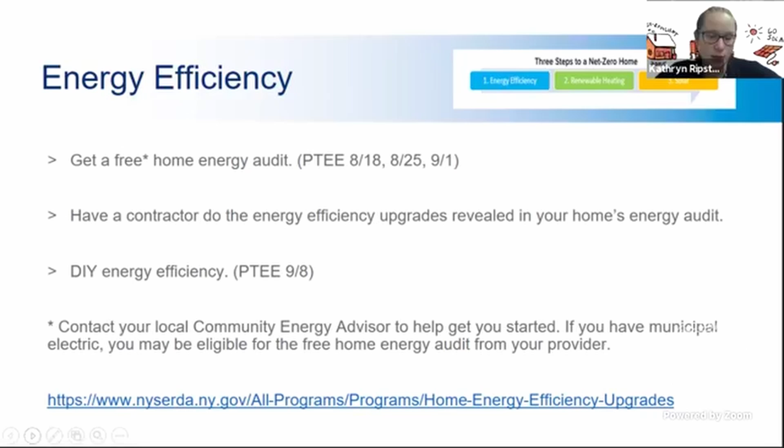So reviewing energy efficiency, one main topic that we talked about in the past is the building envelope and how important that is to your home's efficiency. So if you're heating your home, you want a nice tight box to keep that heat within your home. If you're cooling your home, the same concept. You don't want to be paying to heat the outside air.

And so now there's two main things that make up the building envelope, and that's insulation, which we're going to be talking about today, and an air barrier, so air sealing. And it's really important which order you have these in. So insulation you can compare to a wool sweater. So putting on a wool sweater on a cold day, it's going to keep you nice and warm.

However, there's still holes in that wool sweater that allow air from the wind blowing to penetrate and cool you off. So adding an air barrier on top of your wool sweater, such as we'll compare that to a windbreaker jacket, that'll help reduce that amount of heat loss. So I've got my cozy wool sweater and I have my air breaker over it. The air breaker is blocking that wind from penetrating inside my home, and the insulation is providing that heat, the warmth, and the resistance to the flow of heat.

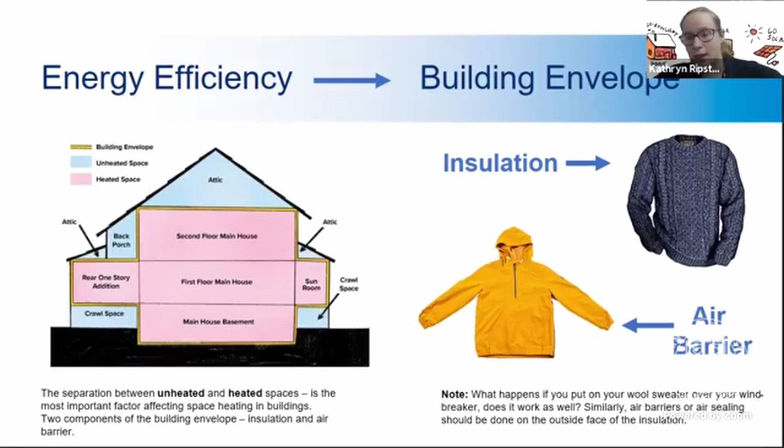And so it's really important which order you put those in. If I were to wear my wool sweater over my air barrier, my jacket would not work as well. So it's always important to have insulation and then the air barrier on the outside of the insulation. So as we are looking into that, we're going to discuss R value.

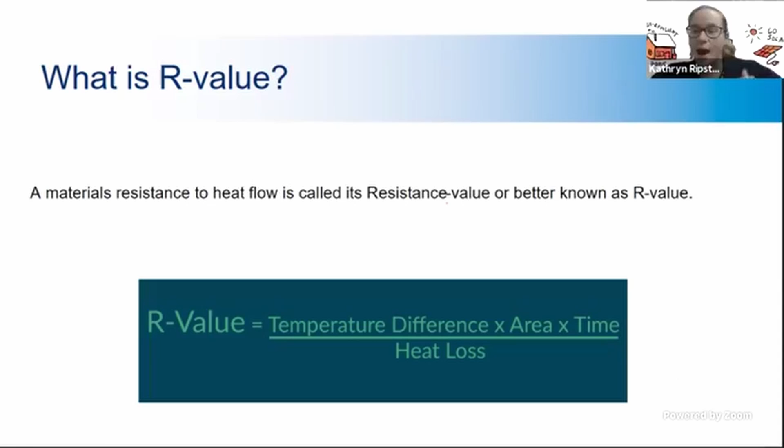Now, if I have any campers or hikers out there, you might have come across R value before if you're choosing an air pad or a sleeping mattress to sleep on when you're outside sleeping in a tent. They are stated in R values. So the higher the R value you have, the better the insulator it is. So that's just the thing you want to know.

R value is going to tell you how well or poorly something is at insulating, so reducing that flow of heat. And so the higher the R value, the better insulator it is, and the lower the R value, the worse it is at insulating. So for instance, if you had an R value of 8 versus an R value of 16, an insulation with an R value of 16 is reducing heat flow twice as much as that of the R value of 8.

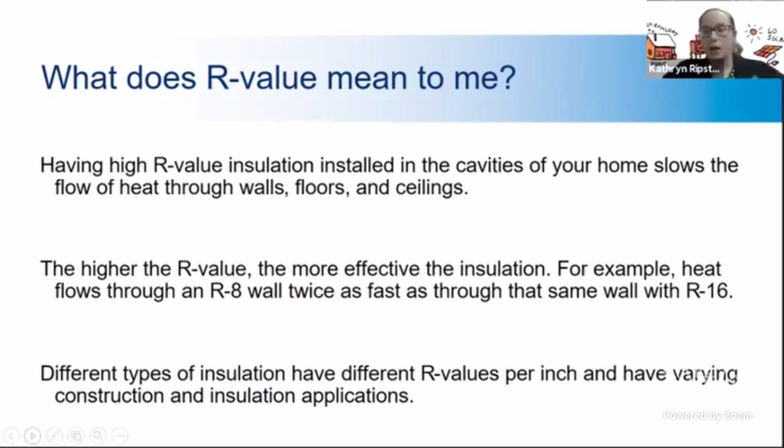And so different types of insulations have different R values per inch and vary in construction and insulation applications. So now we're going to start shifting from our talk about R value to talking about different insulations and the pros and cons about them. But before we do that, we need to look at this factor in choosing insulation.

So building codes regulate how our buildings are constructed, and we have to adhere to building codes, and building codes are really affected by your climate zone as well. So the climate zone is most commonly used by farmers to determine what kind of crops they can grow. So climate zones are basically your climate, your temperature, moisture, wind, and sun, including the daily and seasonal patterns. And so these climate zones do also affect our building codes.

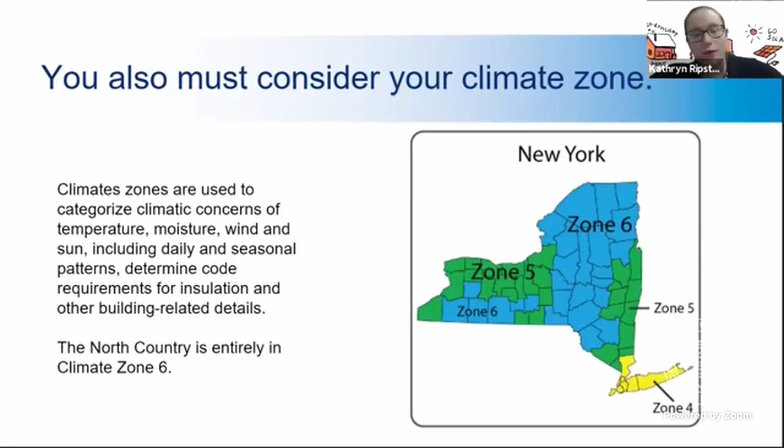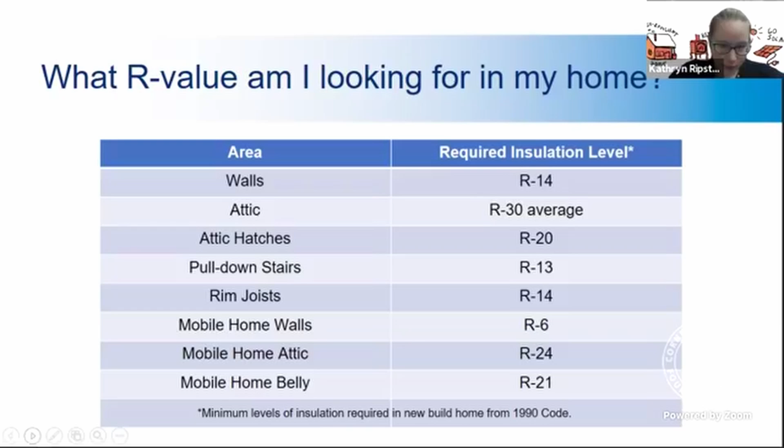And that's one thing I want you guys to know, is that R value is measured per inch and R values stack. So if you take the space in your wall, and it's a 3-inch deep space that you need to put insulation in, if you chose an insulation with an R value of 3.2, you times that 3.2 by 3 because it's per inch and you are stacking that R value.

If you relate this back to the last slide, you can see R value of 14 over here. Well, none of these insulations have an R value of 14, but that's because they stack, and it's based on the volume. So you can achieve an R value of 14 in your walls, but you're going to have to calculate that based on the volume. And so now I'm going to turn it over to Nick, and Nick's going to take us through the different pros and cons of the different types of insulations.

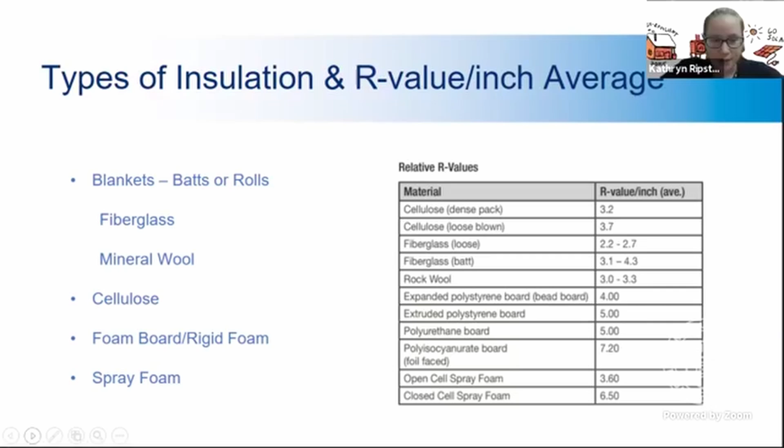All right, so we're going to start with blankets. So these are batts or rolls of insulation, and this includes fiberglass or mineral wool, and we're going to start with fiberglass. And fiberglass is kind of that typical pink insulation that we might all think about when we're thinking about insulation, right? With all of the insulation types, there are pros and cons for each. And you're going to have to weigh that up upon your location in your home and what you want to achieve.

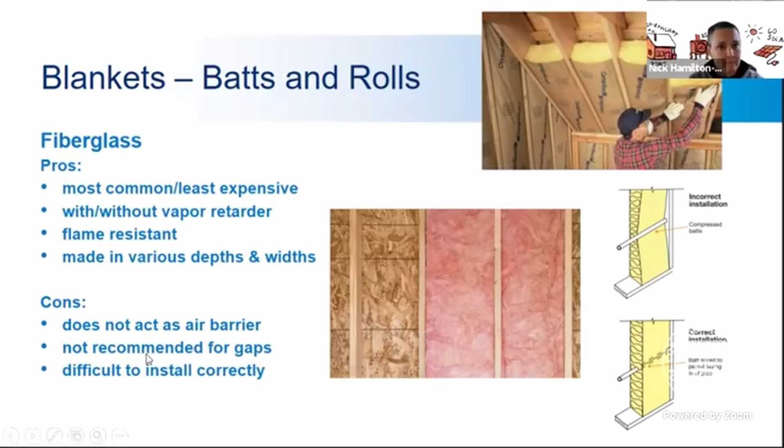And so then mineral wool, right? Also in batts and rolls, it's hydrophobic, so it does not attract water, right? It won't absorb water. So that discourages any mold or mildew growth, which is really good. It has a higher R value than the fiberglass. It is also flame resistant. It can contain up to 70% recycled materials. So this is good, right, when we're thinking about the environment.

It's very durable in both high and low temperatures, right? So thinking about as you go further south and you have very high temperatures, or up here in our area when we get into January and February where we have very low temperatures. And this material has an ability to absorb some sound. So it can act as a kind of a sound muffler. Not that it's going to give you music quality sound room absorption, but it can help with that.

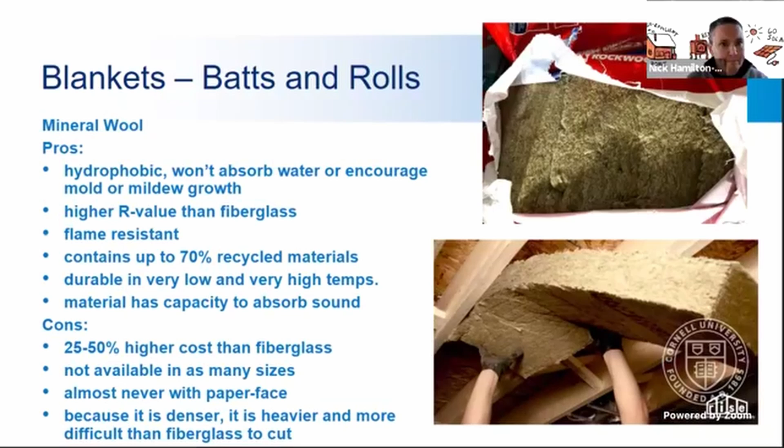And then we're going to move to cellulose. And cellulose has been in wide use since the 70s. It is almost entirely waste or recycled newspaper, which is great if we're thinking about the environment and the potential for global warming. It is less expensive, and it's made up of 20% non-toxic borate, which can help resist fire, insects, and mold. And the application can be either done dry or wet. So just looking at the pictures on the top, those are dry applications. The picture that's on the lower right then is that wet application of the cellulose.

Some of the cons of cellulose, it does hold liquid water. And so the use of a vapor retarder is not recommended. Long-term exposure to water can cause sagging or corrosion of other materials. So thinking about blowing that into your walls, it's going around pipes, which could be metal, around electric wiring, right? So those could potentially see some corrosion should the cellulose get exposed to water. There is material settling. This can be mitigated though by dense packing. So that's really making sure that there is a nice thick layer in those cavities.

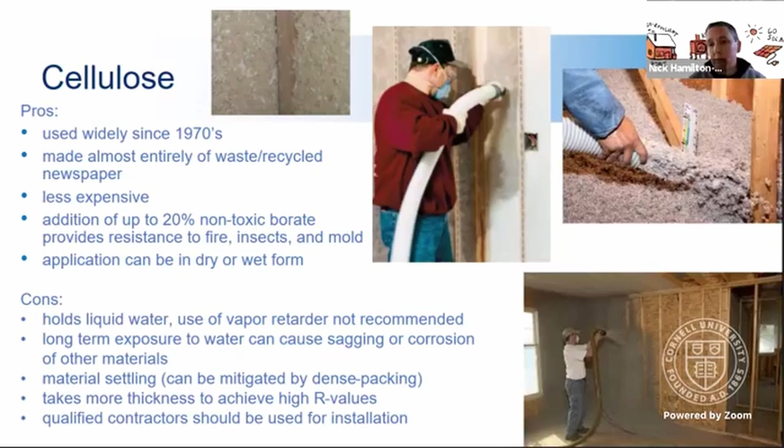I do want to draw your attention to the picture on the upper right, and that is an application in an attic. So the contractor literally puts in almost like a measuring stick and can blow in that insulation to whatever height you need, right? So the application of cellulose in an attic is really good, and combining that with other applications is effective.

It can improve overall thermal performance by eliminating thermal bridging through the framing. So what this does is just an extra way of reducing the heat loss from your conditioned or heated spaces out into nature, or out into areas that are unheated in your home, such as the attic or crawl spaces. This can offer some of the best R values among the foam options, right? So these are talking about just the rigid foam or spray foam. These products are water resistant, and they can have foil or plastic facing, which helps with that air barrier.

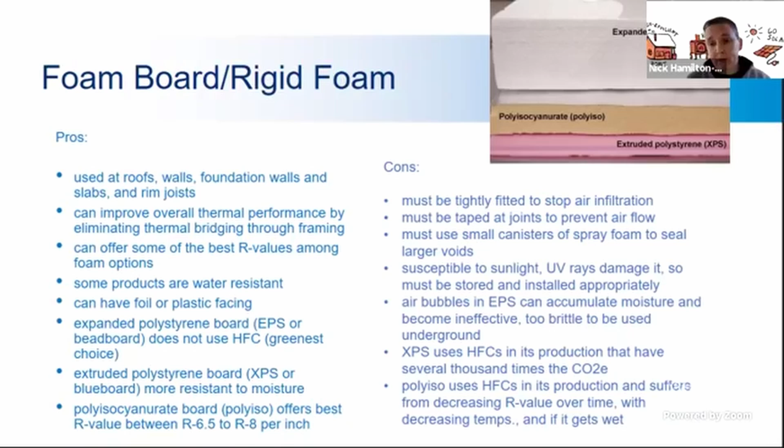And then spray foam. We most often think of spray foam as open cell or closed cell, and those have some pros and cons, but for spray foam as a general application, the pros are high R value and an effective air barrier in a single application, right? So you're working on both that wool sweater and the windbreaker. It can keep contaminants out of your indoor air. Because it's an effective air barrier, it provides resistance to contaminants from outside.

It can be sprayed, poured, or injected into almost any space. It expands completely to fill an area and does not sag. There's more expansion with the open cell application than with closed cell spray foam. And it can add strength to walls and roof, right?

Closed cell is impermeable to water, so it deters mold and mildew buildup better. Closed cell can also reduce some of that outside noise. Open cell is less expensive than closed cell, and they're both fire retardant.

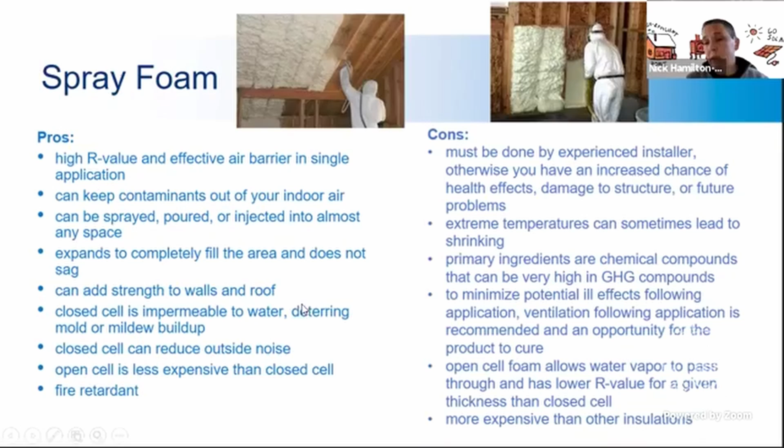Open cell foam allows water vapor to pass through and has a lower R value for a given thickness than closed cell, just thinking about those two different types of spray foam themselves. And this particular application is actually more expensive than other insulations. You have to make sure that you have an experienced installer, and it also needs specialized equipment to be installed.

And so we saw those two slides that Katie was talking about, stacking your R value. When you are making the decision to upgrade your insulation for your home, or you're building a new home and you're thinking about what you want to insulate it with, you have to think about the location in the house, right? So are we talking about the walls? Are we talking about the attic? Are we talking about the foundation? Are we talking about rim joists, right?

You then have to take into consideration also the type of insulation. So are we looking at cellulose versus the fiberglass or mineral wool versus those foam boards, whether they be the different types of rigid foam boards or spray foam, right? And then having to think about R value for each inch of those different types of insulation. You can also combine some of these different forms of insulation.

And when you're doing upgrades to your home, you're putting new siding on your home, that rigid foam board is good because then you're breaking that bridging that can occur between the inside and the outside of your home, which adds extra warmth to your home. So some of these applications are really good if you have walls open or you're putting new siding on, right? So you don't have to just think about insulation as just on a new home. Our older home stock here in the North Country can actually use many of these various different forms of insulation to up that R value and make you more comfortable within your home.